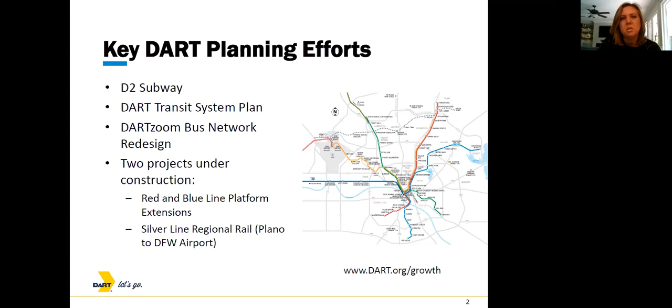So I'll start and just kind of focus in on D2 subway a little bit. For those of you that aren't real familiar with this, it's been in the works for a long time. Back in 1990, the city of Dallas and DART actually signed an interlocal agreement related to the light rail system, and included in that was some language to start planning for a subway when ridership warrants were met. So in 2007, we really started planning in earnest for this project.

A few years ago, a new program came about at the federal level called Core Capacity, and it's a funding program where you can get up to 50% of a grant for a project. This is a $1.7 billion project in our current year estimate. So it could be a significant grant to help advance the project.

But what we've done is we've gone through a series of alignments. It's a complicated process because of downtown and the development that keeps happening. You have to kind of keep pace with that, but planning a project can take 10 to 15 years. So there's always things changing. But we've settled on this alignment right now.

There's still a little bit of work to do, but basically it starts by Victory Station up by American Airlines Center up on the north part of the alignment. And then we have a station planned next to the Perot Museum of Nature and Science. And then we would dive down into a subway alignment right near Woodall Rogers Freeway, which is that first purple box that you see. And we would be subway running through the remainder of downtown until we get to 345 near the Deep Ellum area, where we would come out of the ground and reconnect. So 3 new subway stations, and I'll walk you through some of the design so you can see some of the things that we're working on.

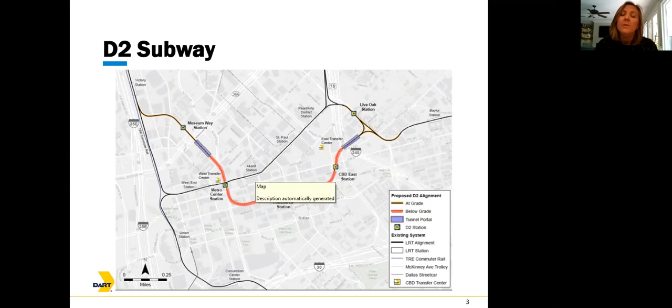The plan for D2 would be that we would actually shift our green and our orange line over to this new corridor. The red and blue would continue to operate as they do today. And what this allows us to do is balance our operations in downtown, split our lines, and be able to add more service into either of those corridors over time and sustain our system and the growth in the region. Right now, since all 4 lines operate on that one at-grade alignment through downtown, we're pretty much maxed out on the service that we can push through downtown at our 15-minute headways on each of those lines. So D2 is important to be able to continue to expand the light rail system and to grow service over time.

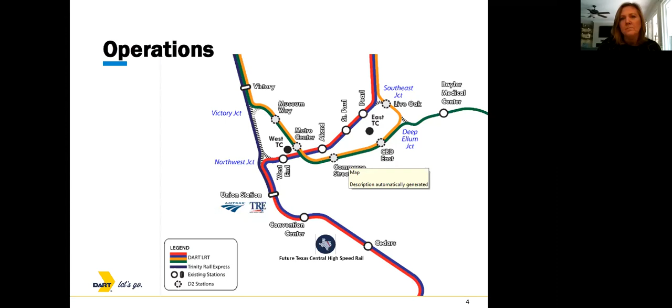The main reason we're doing it is for that capacity improvement. We're also doing it because it allows us some operational flexibility.

As you know, if you've taken DART to the state fair or anything like that, we operate a lot of extra service on days like that. There's also been times when there's been a fire downtown or something in a building next to our alignment, and we've had to shut down for several hours or potentially a day. So this gives us an opportunity to keep people moving through downtown and to have flexibility to add more service and new service patterns in the long term.

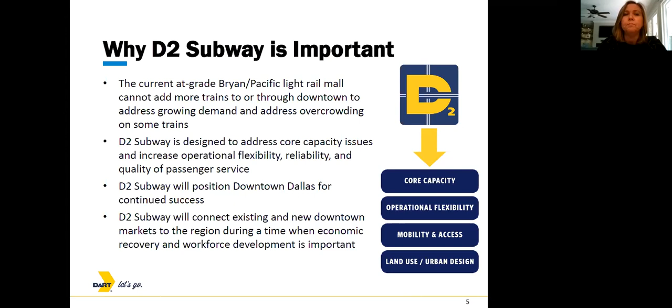As I mentioned, we're going through a federal process to get a significant grant under the FTA's Core Capacity Program. We have gotten medium-high ratings. They have a set of criteria that you submit for, and you get rated in order to move through their process. Our last rating was in 2017, and the reason we haven't done it since then is because we had a different alignment back then, and we rated medium-high.

The Dallas City Council just passed a resolution on March 24th, just a few weeks ago. It's taken a while to get to that point, but they did support going ahead and issuing our final environmental impact statement.

That's on our website if you're interested in looking at that. It's a nearly 400-page document, but it has a lot of information about the project in it and all the design plans. They also supported us going ahead and submitting our project to work towards that funding grant.

But there still are some concerns on the east end of the project near 345 and Deep Ellum, and we're going to continue to work with our agency partners on that. The City Council is set to consider another resolution no later than March of next year. Again, lots of information on our website if you're interested, and I'll talk a little bit about some of those East End concerns as we go through it.

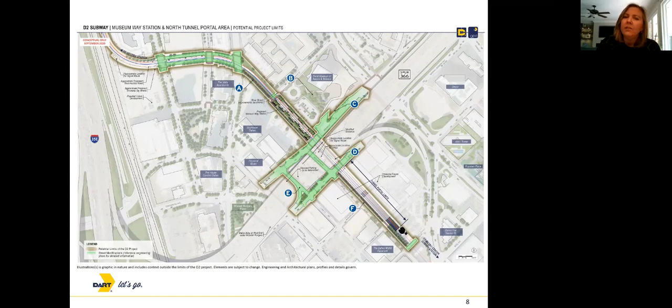Right south of Woodall Rogers is where we dive into a subway, so there will be a tunnel portal right here. There's also a big parking lot right there that we're sort of on the edge of.

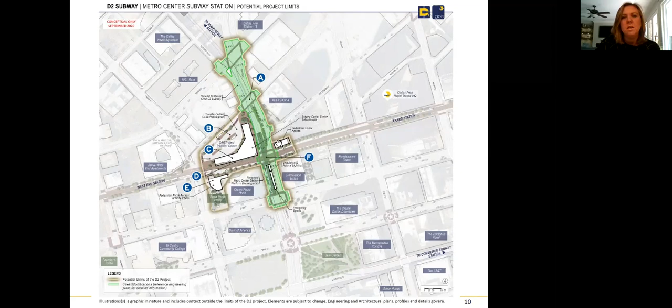As we move further south into downtown, we have a big bus transfer center called the West Transfer Center in the West End area, right next to our existing station there. The green shaded here is Griffin Street, basically north of Elm Street downtown. This white triangle looks like a bomber airplane, but it's that eagle-looking shape right there - that's our main head house. A head house is basically a building where passengers can enter and then head down to the station below. We have a couple of smaller places to enter as well.

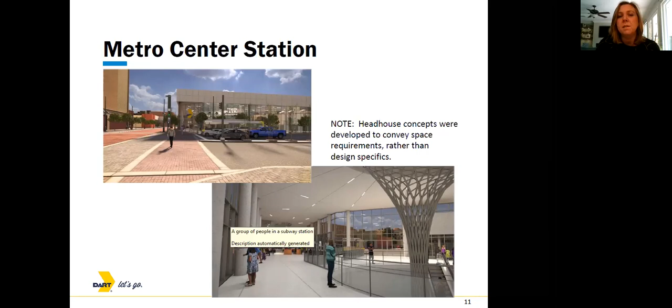Imagine walking across the street at Griffin, where our existing rail line is. This would be our new head house building. It may not end up looking exactly like this when all is said and done, but we've designed it to be bright, with lots of natural light. This is an interior shot where you enter, head through fare control, and go down escalators to the platform. We have a lot of good animations and plan drawings showing what that looks like.

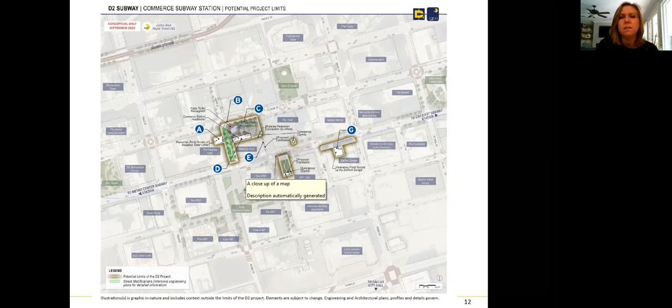Once we cover it all up and build our station, we would put the park back in a reimagined state. We've had some stakeholder meetings with some of the original founders of the park and the artists to try to imagine what that might look like.

A lot of people think a subway is just a line put underground, and that it's easier than a line at surface. But there's a lot that goes on underground, and this gives you a flavor of the levels at this station. You can see the tube under Commerce Street to the right of your screen—that's where the train goes through, and that's where the platform is.

Magnolia Hotel is at the center top of the map. We would have a new head house, an access point built on Pegasus Plaza. Below Pegasus Plaza, you can see the escalators and the mezzanine level, taking people down to a cross passage under Akard Street—headed towards AT&T, or headed towards the platform underground.

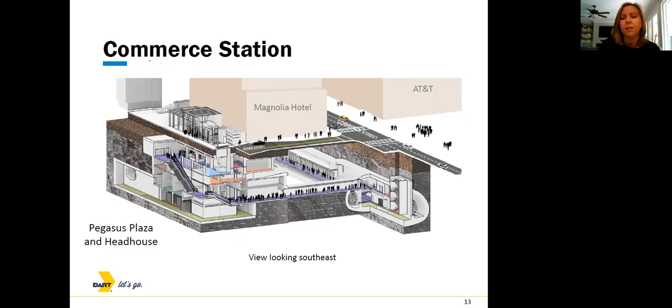So it's a very complicated station. Pegasus Plaza really gives us a good opportunity to build down, get all that infrastructure in place, and then put the park back on top.

Moving further east, I don't know if many of you are familiar with the East Quarter development happening—that's on the bottom right of the slide. Todd Development Interests is doing a lot of rehabilitation of historic buildings in that area, as well as some new high-rise buildings with apartments and office space. That'll be a new kind of entertainment spot for the city when it's all said and done.

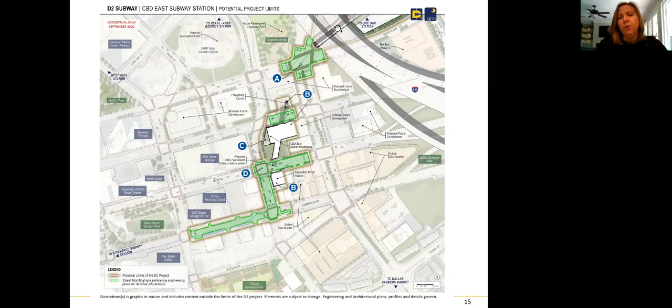Our station is just between Pearl and Cesar Chavez, again with a couple of access points. This is a much shallower station, probably only about 35 feet deep, so it's a little simpler to build, but we're still underground at this point. Where you see this X labeled A, that's a major intersection in downtown, and right after we cross under that intersection, you'll see a portal under the freeway—that's where we start to rise back up out of the ground.

Here are some images of the CBD East station from the street, to show what that head house would look like. It looks a little barren right now—I'm sure there'll be landscaping and things like that. But again, we're trying to put as much natural light into these places as we can, not only for security purposes, but just to make people feel a little bit better.

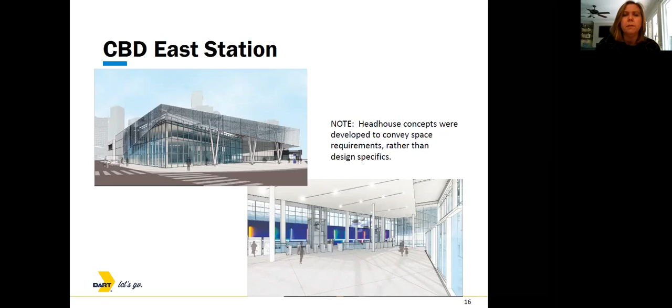On the east side, this is where we still have some issues to work out. Even though the project's been approved, there's still a desire to address concerns of the Deep Ellum area, because there's a lot of growth happening over here. TxDOT has an I-345 feasibility study underway, and they haven't determined their future option for 345. There's discussion about either rebuilding it as an elevated facility, which wouldn't conflict with D2 as we have it designed, but there's also desire to possibly bury 345 as a depressed facility underground. If that happens, like Central Expressway or Woodall Rogers, you'd be in conflict with where our portal location is.

You'd have to go a little bit deeper than they'd like to get under it. It can be done. It's not necessarily desirable from TxDOT's standpoint, but they've looked at different design options and it's feasible. It would just cost a little more, and there might need to be a drainage facility because I don't think they can gravity drain anymore. So as they continue their study, we want to work with them more to optimize that interface.

Then we have a connection over here to our existing Green Line. That's where our Deep Ellum station is right now, but we'd relocate it just to the north near Live Oak Street, where the Latino Cultural Center is. There are some historic buildings and new development happening in that area too. Down to the bottom is where the Epic development is - if you're familiar with Epic in Deep Ellum, brand new development, just south of where our alignment would be.

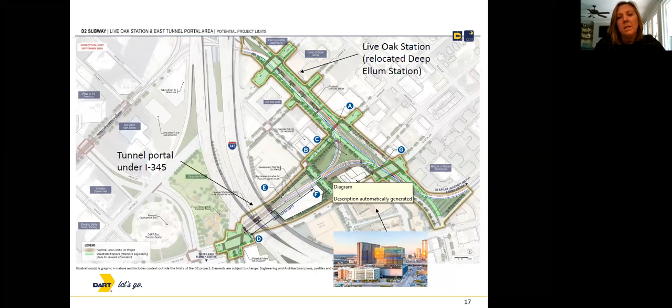We've had a lot of meetings on the project - just in the last few years, we've had 150 meetings, probably more now, with stakeholders throughout the area. We have a lot of really good broad-based support for the project. TxDOT says they'll work with our different options, but they're early in their feasibility study still, and they want to work with us more on that. Then the Deep Ellum Foundation, just recently, late last summer, submitted a letter opposing that at-grade connection.

So that's why we need to work through this East End evaluation, as we're calling it, to see how we can better address their concerns and optimize the interface with 345. We'll be doing that over the next several months. It's a joint effort with the City of Dallas. The North Central Texas Council of Governments is very involved, TxDOT's involved too, but the city is leading the effort. Their council resolution was very clear on getting to a point where we're all in agreement on the path forward, with a resolution no later than March of next year.

Really what we want to do is look at everything going on in that side of town. In addition to 345, there are various projects in the Deep Ellum area - Carpenter Park is under construction right now. We want to make sure we're not reconstructing multiple things at multiple times if projects are on different schedules, and see how we can best integrate everything into that area.

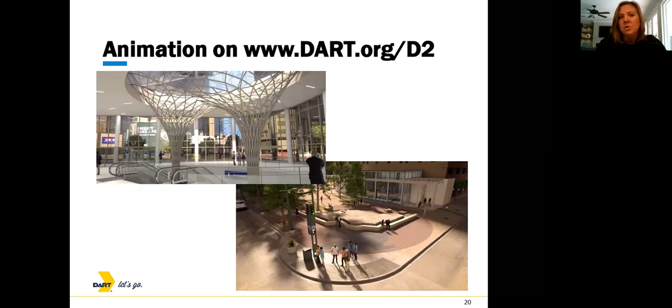The next few slides, I just want to give you a brief update on a couple of other efforts that we're working on.

We do a long range transit system plan every few years. Actually, every 10 years or so we do a major update to it, so it's time for us to do that. We've been working on it for a couple of years, and we kind of hit pause on it because a lot of people wanted to redesign the bus system, and that's a very critical component. So we're going to be integrating that DART Zoom bus plan that's underway right now into our long range plan.

So rider experience: what can we be doing differently to make it a better experience to use transit for all of our riders, whether they're current riders or future riders.

Mobility and innovation. We do have a chief innovation officer on staff right now. He is very involved in our GoPass app and how we can continually integrate other providers into that, so it's like one-stop shopping and payment for getting around, whether it's DART or other providers in the area.

Service and expansion will outline some of the bus corridor improvements that will come out of DART Zoom. There's an opportunity for bus rapid transit in several of the new corridors we're focusing on. There probably won't be a lot of new rail expansion in this plan. Part of that really depends on D2 happening. If D2 is not in place, there's really not a lot of expansion that we can do.

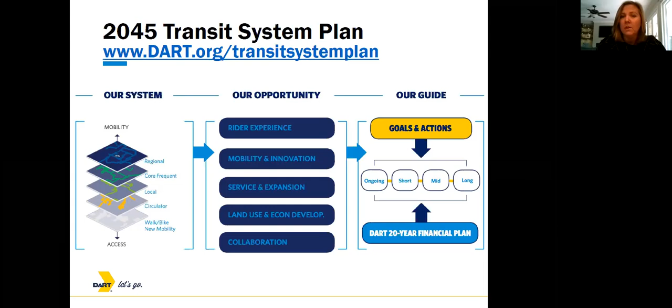From our 13 cities - a few slides on DART Zoom. If you're not familiar with that, this is a major effort to support service changes on the bus side by January of '22. There's been a lot of work going on in the last 2 years.

We've hired a national consultant that's done a lot of these efforts throughout the country, and it really is starting from a clean slate - like, if you didn't have a bus system, what would you do? Looking at what is on the ground right now and where people need to go, what type of service they need. The current draft plan is actually on our website, and I've got some links at the end of this.

Our board set forth some goals for our staff to focus on: do we want to focus on ridership and have a lot of routes that really have good frequency so people don't have to wait long? Or do we want to focus more on coverage, which means you might have a lot of routes throughout the service area, but they might not be as frequent, meaning you have to wait longer, and transfers are less convenient.

So the whole plan is built around trying to focus on those high ridership corridor routes, and then supplementing it with what we call GoLink coverage, which is sort of an on-demand type of service similar to Uber and Lyft, for those areas that really don't have much demand for transit. How can you fill it in with these different types of new services?

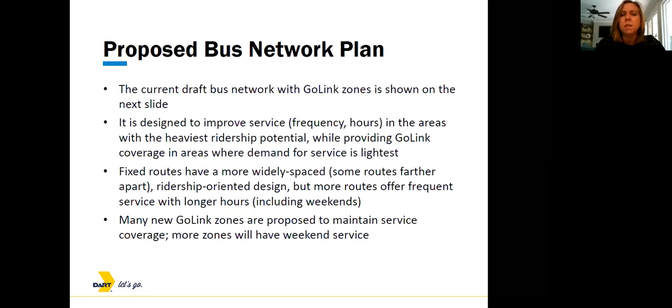But what we've been doing is making more improvements midday, and we're seeing a good ridership jump with better service just in the midday, for people that might not work regular shifts, or that need to run errands, get to school, or get to doctor's appointments. So there's a lot more emphasis on midday and weekend service in this new plan.

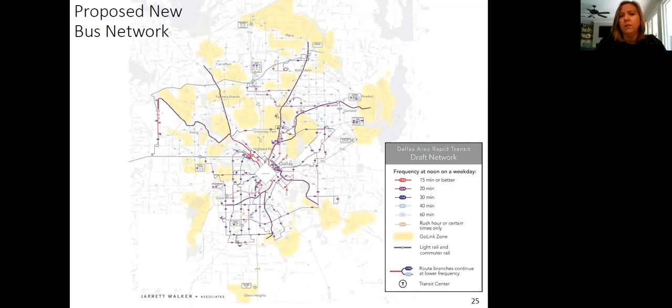I mentioned GoLink. You can book that through our GoPass app. There's also a phone number to call. We're partnering with Uber Pool in a lot of the zones - actually, in all the GoLink zones now, and that's new. We've been adding them as a partner in a lot of these. We also have smaller vehicles that operate in different zones to serve different areas, which is good for trips within a zone, or trips from a zone to a major transfer point to catch a light rail line or a major bus route.

There's a lot of meetings going on right now. The timeline, as I mentioned, started in 2019. It's proposed to be approved by our DART board in August of this year. There's a lot of public meetings going on right now. There will be a public hearing at our DART board meeting on June 8th, and I'm sure we'll get a lot of comments, and there may be some changes to the draft plan that's online based on those comments. But there's a lot of work to do to implement this by January of '22.

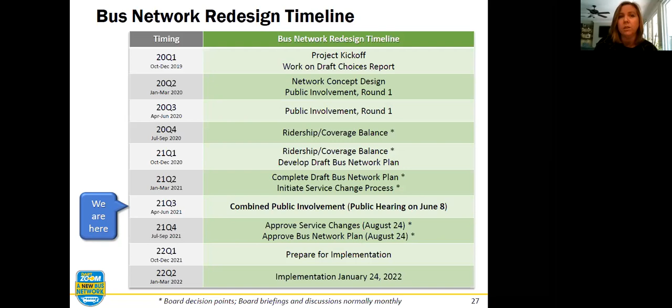So that's all I have for today. I am happy to answer questions. If you want, I can stop sharing my screen, or keep it up here in case anyone wants to go back to a specific slide. Let's keep it up in case we have specific questions that pop up.

I've had several questions come to me, and you've touched on a lot of them already. But Kay, I want to start first by saying thank you - this was a wonderful presentation. You have knocked out actually several of the questions that I received, like someone asking about the potential lowering of 345, which you touched on. I've had a chance to look at the virtual walkthrough animation on the website, and that is a very, very cool thing. I highly recommend anybody go to dart.org/D2 to check that out.